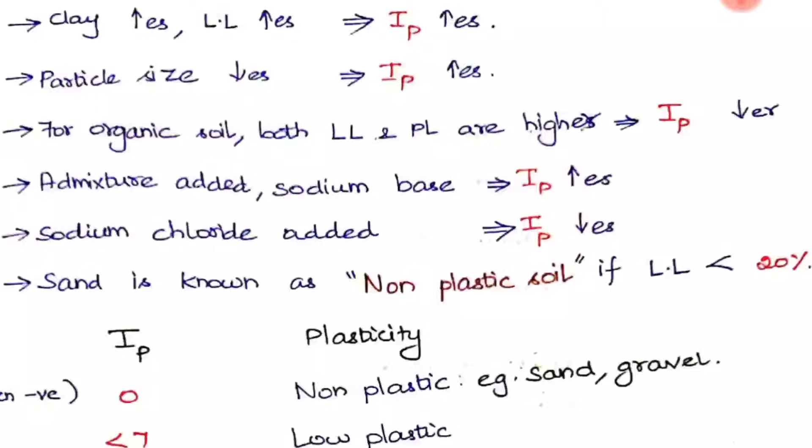For organic soil, both the liquid limit and plastic limit will be higher, so the IP will be reduced. If admixtures are added to the soil, like sodium base, the IP will be increasing, but if sodium chloride is added, the IP will be decreasing. Sand is known as non-plastic soil if its liquid limit is less than 20%. So if it has a lesser liquid limit, we call it non-plastic soil.

The range of IP values is given here, so based on that we can find the plasticity of the soil. If it is 0 or even less than 0, that is negative, you should denote it as 0 only, and at that time we call that soil non-plastic. Normally sand and gravel will be of this type. If it is less than 7, it is low plastic; 7 to 17 is medium plastic; and if it is greater than 17, it is highly plastic soil.

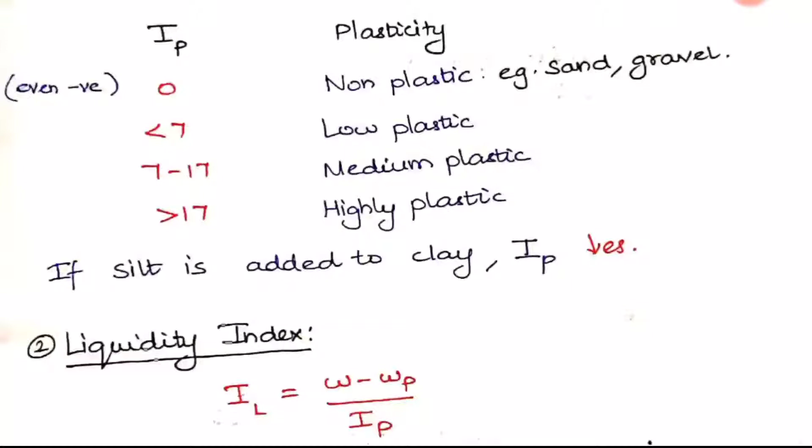If silt is added to clay, what will happen? Comparing silt and clay, silt has a greater particle size than clay. So when we add a greater particle size soil to clay, its IP will automatically decrease. This is also an important point here.

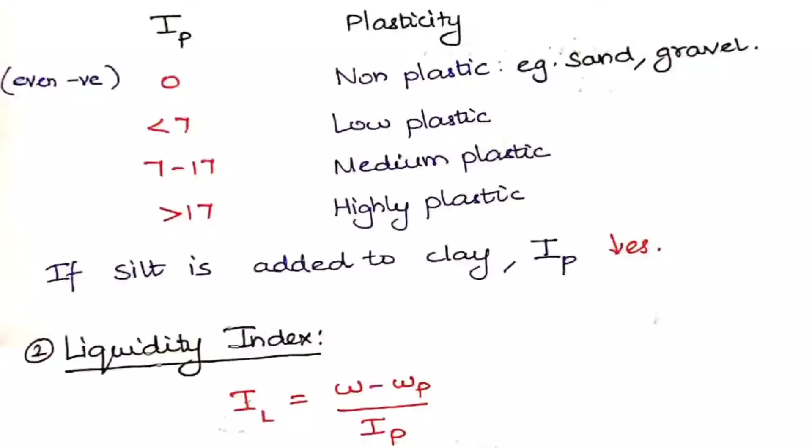The next thing is the liquidity index, IL, which is equal to the water content of the soil minus plastic limit, divided by IP, the plasticity index. The water content value will vary with respect to the soil. If the water content of the soil is equal to the liquid limit, the formula becomes liquid limit minus plastic limit, divided by IP. Since liquid limit minus plastic limit is IP, IP divided by IP becomes 1.

So IL will be 1, meaning the soil is in a liquid state. When the water content is greater than the liquid limit, IL will be greater than 1, denoting a very soft soil. If W equals the plastic limit, the formula becomes 0, because plastic limit minus plastic limit is 0, meaning the soil is very stiff.

When the water content of the soil equals its shrinkage limit, the IL value becomes negative, meaning the soil is of a brittle nature.

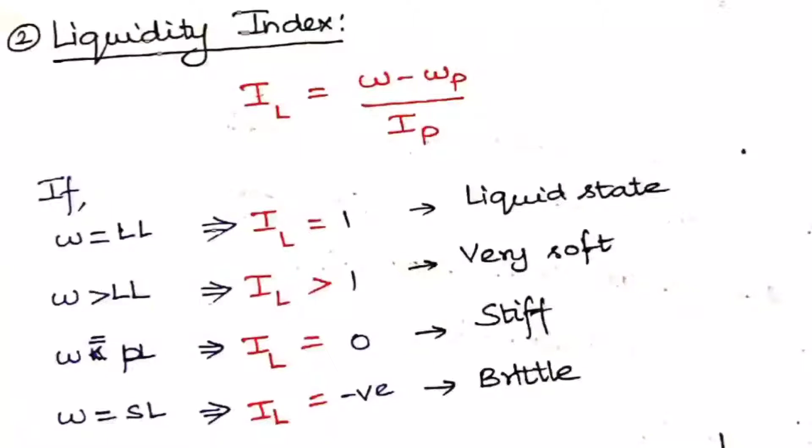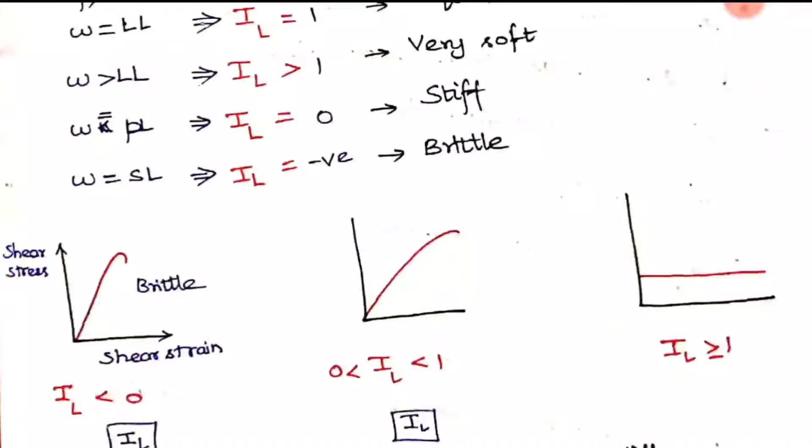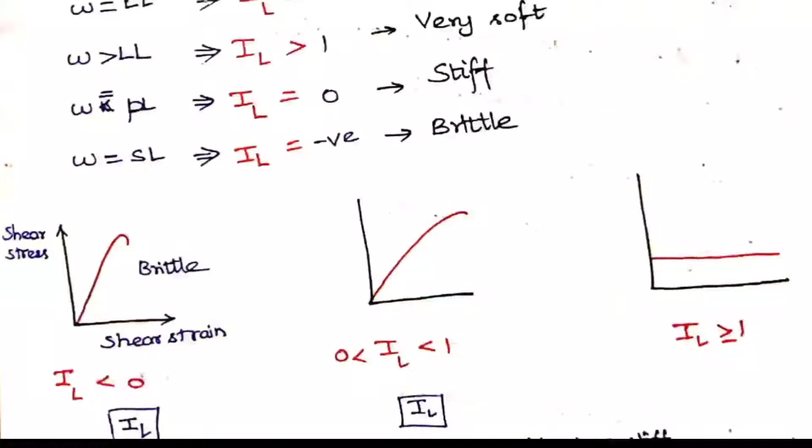You can see the diagrams here representing the shear strain and shear stress behavior of the soil with respect to this IL value. When IL is less than 0, it is a brittle soil, so it acts like this, brittling at a particular time. If it is between 0 and 1, it will be a regular curve. If it is greater than or equal to 1, it will have constant shear stress, with only the shear strain changing for that type of soil. So the values ranging from 0 to 1 for IL and its respective soil behavior are given here.

This is also related with the IC value, which we will be studying later. As these both are similar, I have written them both in the same table. If IL is greater than 1, it is a liquid state. If it is 0.75 to 1, it is very soft and plastic in nature. If it is 0.75 to 0.5, it is soft soil. 0.5 to 0.25 is medium stiff soil, and 0.25 to 0 is stiff soil. If it is less than 0, it is semi-solid, hard and brittle in nature.

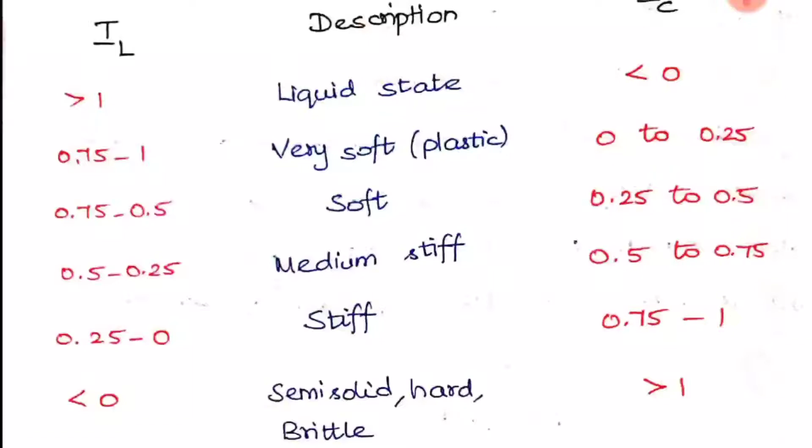The same thing will be in reverse case for the IC value, from 1 to 0 in reverse order. So here comes the IC, which is called the consistency index or relative consistency, which is actually giving a behavior of resistance towards the soil.

IC will be equal to the liquid limit minus water content, divided by IP. So when you add this IC and IL, that is the liquidity index, you will be getting 1, because WL minus W plus W minus WP you will be getting, so automatically the liquid limit minus plastic limit becomes IP.

So IP by IP will be equal to 1. And the fourth index is the toughness index, which is actually determining the strength of the soil. IT is equal to IP by IF, where IF is the flow index, which we have seen in the liquid limit studies, where we do the Casagrande apparatus test and plot a graph, and from that you take a slope to find the IF.

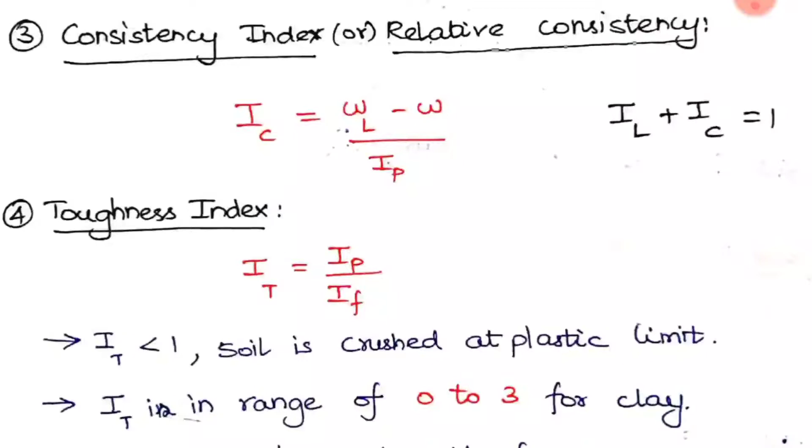That value is the IF value here. When IT is less than 1, the soil is crushed at its plastic limit only, and for clay it is normally 0 to 3, and it indicates the shear strength of the soil. If the IF is more, then the shear strength will be decreasing.

The IF is in the denominator of that formula, so if IF is more, the IT will be automatically reduced. So if IF is more, that is the flow index is more, the toughness index will be reduced. It means that IT is directly proportional to the shear strength, and IF is inversely proportional to the shear strength.

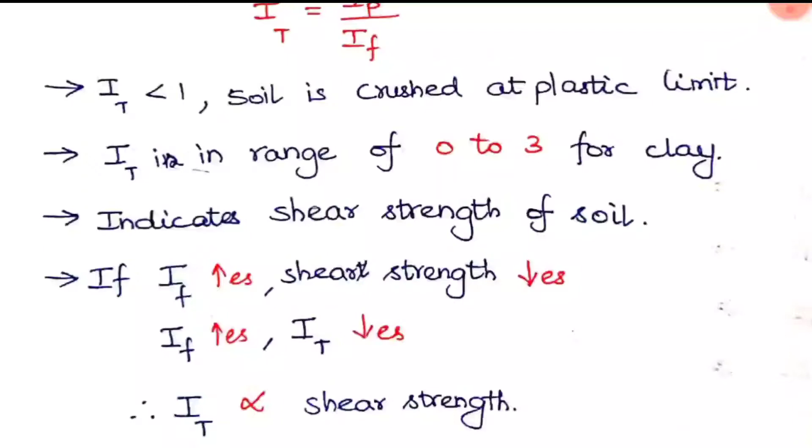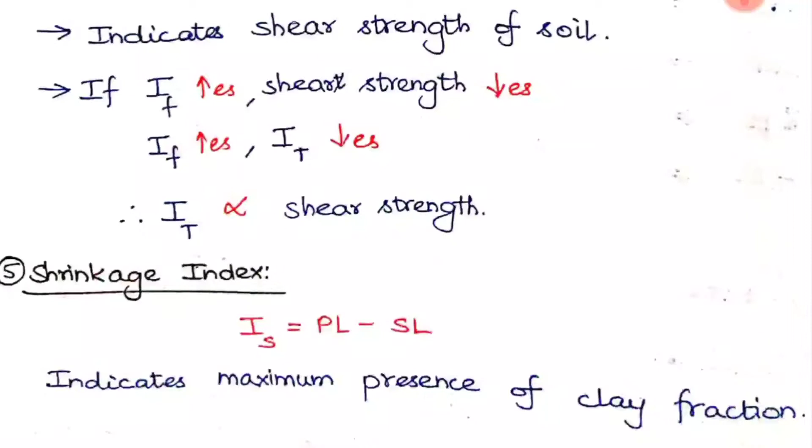The next is the shrinkage index, denoted as IS, which is equal to plastic limit minus shrinkage limit. It indicates the maximum presence of the clay fraction.

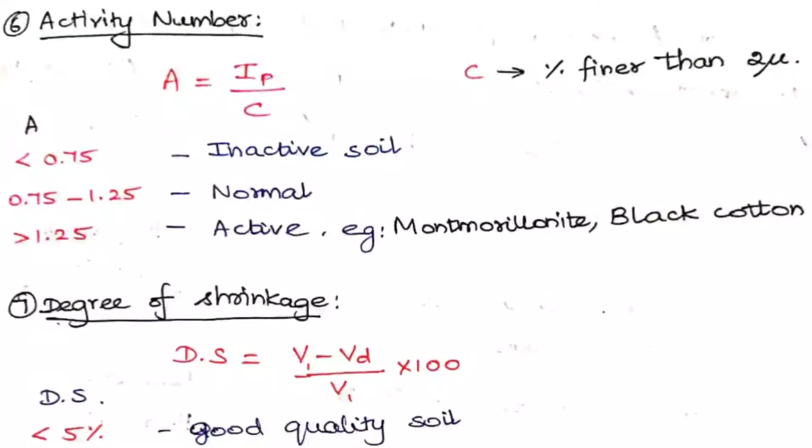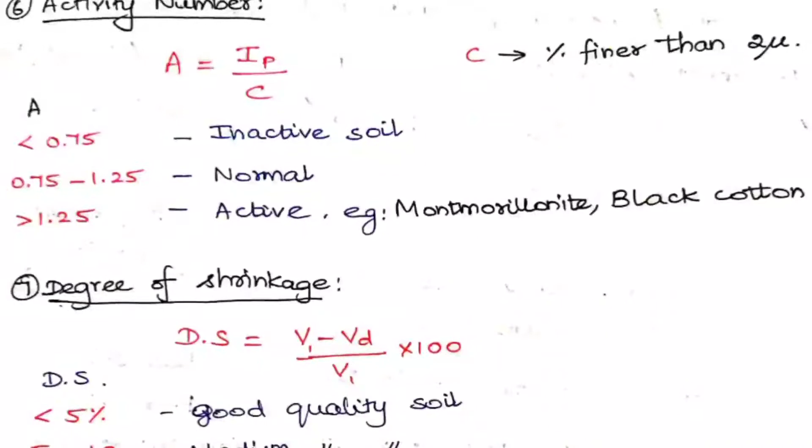The next one is the activity number, denoted as A, which is equal to IP by C, plasticity index by C. C is nothing but the percentage finer than 2 micron of a soil. This activity number actually denotes the water holding capacity of the soil. If the value of A is more, it means the water holding capacity of the soil is more. Here also the range is given.

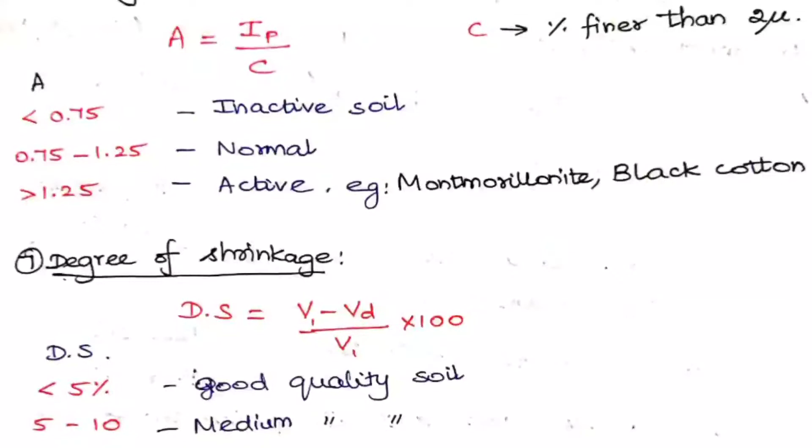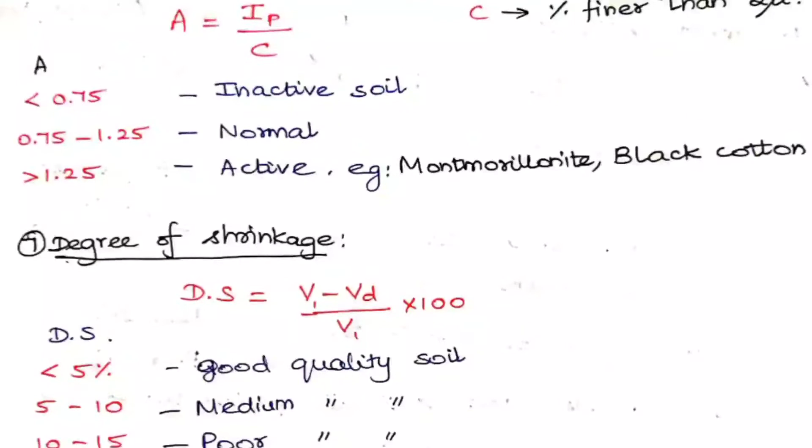If A is less than 0.75, it is an inactive soil. If it is 0.75 to 1.25, it is a normal soil. And if it is greater than 1.25, it is a very active soil. Examples are montmorillonite and black cotton. This montmorillonite we have already seen, it is more in bentonite soil. This bentonite will actually have an activity number greater than 4.

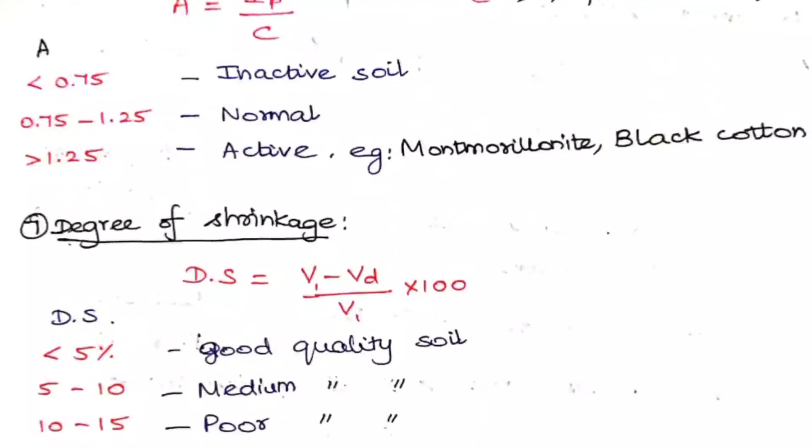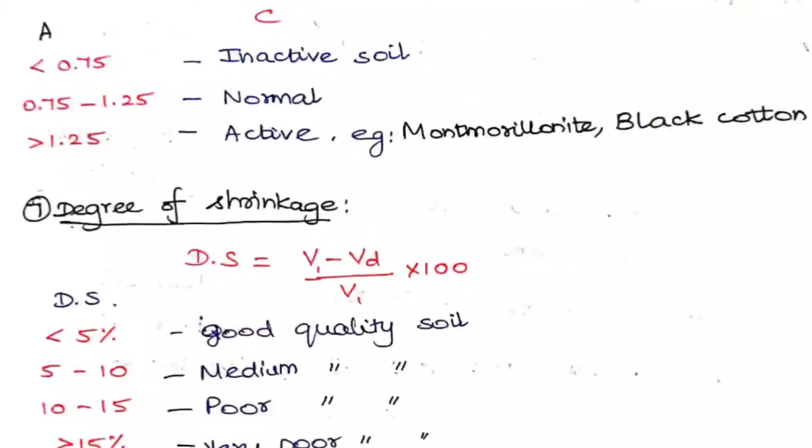The next one is the degree of shrinkage, which we have already seen. Here also the range is given for this value, and with that we can find the type of soil. If the degree of shrinkage is less than 5%, it is good quality soil. If it is 5 to 10, medium quality soil; 10 to 15, poor quality soil; and greater than 15, very poor quality soil. So the degree of shrinkage should not be very high for a soil.